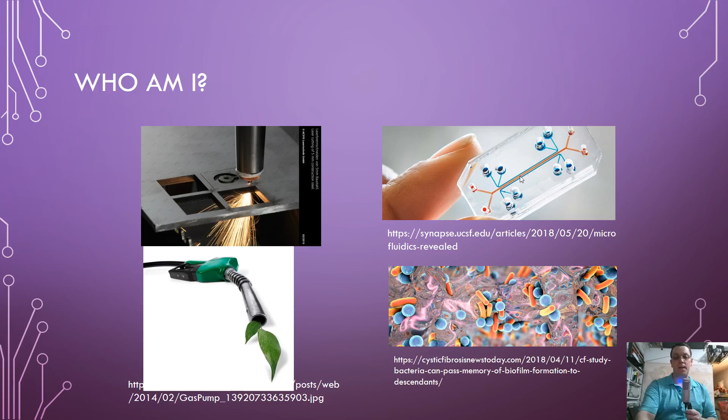So I've worked with ethanol and butanol, and if you guys have questions about alternative fuels, why ethanol is really a complete mistake by our economy right now, and we need to be pushing for more advanced biofuels like butanol, I've learned all kinds of fun things about those, so come talk to me at some point about those if you have some questions.

So I'm going to go through some of the basics of what to expect in the course, but one of the first things we've got to do early on is we need to get you guys downloading and installing this. So I think likely there's going to be on your tables some sheets with the serial number that you guys are going to need. So go to this web link: solidworks.com/sw/education/SDL form.html. You can also get there by searching for SolidWorks and then SEK, as in Software Educational Kit, and that's what will get you there.

I may have also posted a form in the week 1 announcement to LoudCloud, so go there and start downloading it. That is going to look something like this. What you're going to see here is an option for downloads. You're going to say English or your preferred language. You're going to say yes, I've already got a serial number, because you're already going to have a serial number. The version you want to select, this is very important, you want to select the 1920.

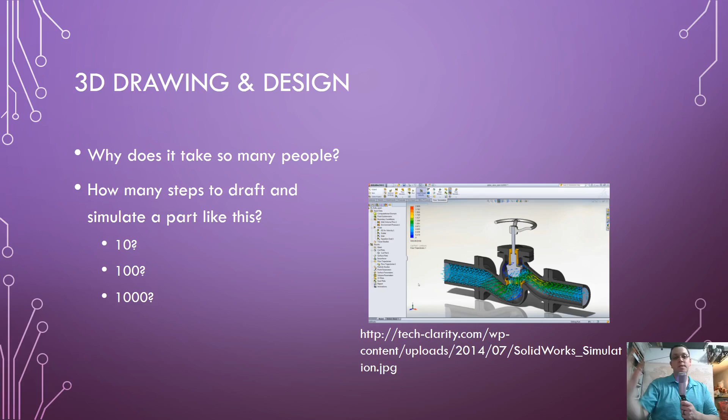Okay, so what we're going to be doing primarily in this class is the SolidWorks software. We might sometimes use MATLAB for a couple things at a later point, but we'll have to determine that. This is something you're going to use for a lot of other classes anyway. But you want to make sure that your computer is compatible by going to the SolidWorks system requirements page. And the idea is, if you're running like a dual core laptop from 2002 and you have like 2 gigs of RAM, you're probably going to struggle in terms of hardware.

Another thing that you guys are going to want to do, and this is something I want you guys to start trying to do early on, is get yourself a mouse to work with. See this? This looks really super fancy. Do you know how much this cost? $20 at Fry's Electronics, okay? There's all sorts of mouse options. I prefer a wired mouse myself because I have slightly large hands, and those little carpal tunnel mice drive me absolutely insane. I cannot work for long periods of time with those comfortably.

The more comfortable you are with your tools, especially ones you're going to be using day in and day out in engineering, the less distracted you're going to be, and the more efficient you're going to be with your workflow. All of those 5 minutes here and there adds up, because how many people have taught you so far that you need to be spending typically at least an hour to more like 2 hours outside of class time for every hour inside class time? See, that's what I thought. Not a lot of hands raised. So that's an expectation that engineering has on you as a student.

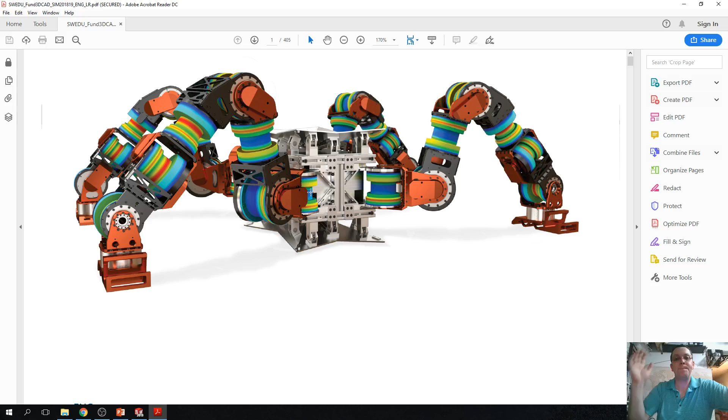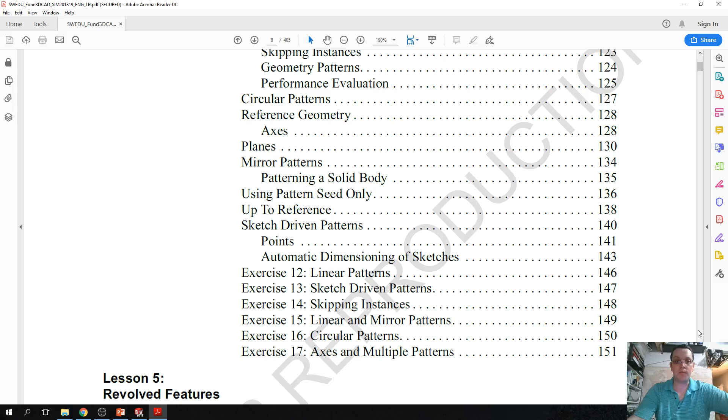That's okay. That's actually okay. Especially if you guys have had some amount of experience in this before, or some amount of experience in 3D drawing in general. It's going to teach you a lot about how these things work. So it's going to walk you through some of the basics of sketching, give you some example exercises. So it's even going to show you what some of the buttons look like.

Let's see, where's the starting point? Yeah, so it'll also point you to the tutorials. So there are some SolidWorks tutorials you guys are going to be actually working on as part of the homeworks for some of these. So you need to complete them and then submit them. There's also some rubrics that are going to go with those. And where all of that is located is actually going to be under Help.

So one of the things you're going to want to do at first is up around SolidWorks there will be kind of an arrow you can move your mouse over that'll expand this menu. I pin it because otherwise it's a moving target and that can get pretty annoying. It's a lot more convenient if you just pin it and say, okay, now I want SolidWorks Help. Well, how about the SolidWorks Tutorials? Oh hey, that opens up a window with tutorials.

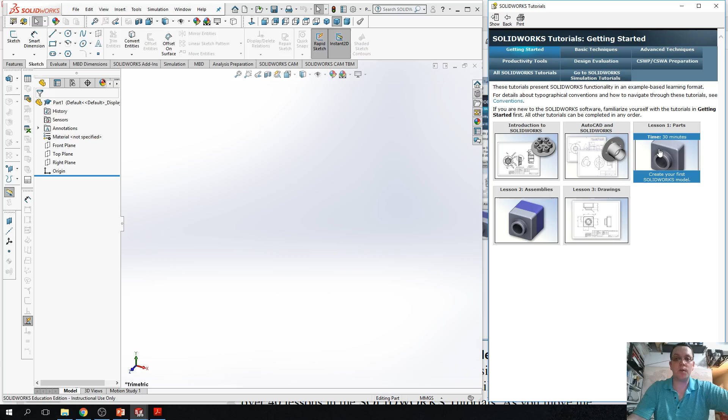So one of the quickest ways on your own, we're going to focus each day on some different kinds of specific skills, how and why to apply them. And one of the things that we're going to do is learn just some fundamentals about the interface. So there are a few that you guys are going to have to do. I think the parts might be one of them. So what it's going to do is you want to go to, let's see, creating and saving a document, for instance.

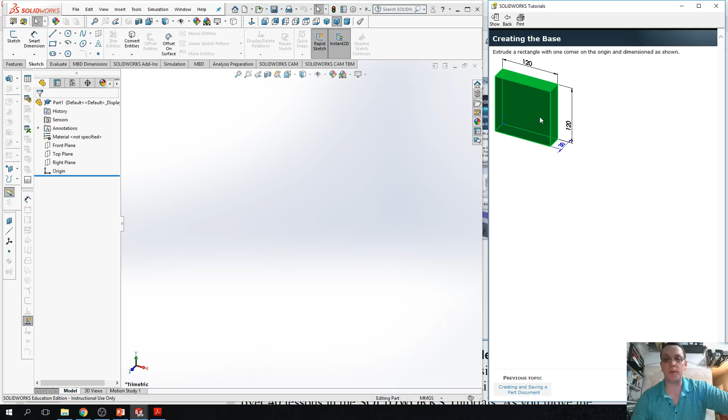So what these tutorials do and why we recommend you guys using these is there's these little orange boxes. So if you click it, it's going to show you in the interface what some of those specific buttons are, and it's going to help you start learning a little bit more about how to use the interface, how to save models, different options for saving, and then eDrawings and things we'll get to much later. Those are not really as useful as what we were hoping they would be, but each and every time they will show you what you're doing. So this is like an overview, and then they tell you how to get there.

And so we're going to go over a few kind of basics today, but that's where the actual tutorials are located. So those are pretty helpful, but you don't necessarily need to use those immediately. So what's one of the first things we want to look at today? I want you guys to get familiar with the Command Manager here.

So one of the other things I want you to know is there's all sorts of things that can mess with the interface. Sometimes if you're working on one of the computers that are around the edges of the room, some of the time those will have lots and lots of reconfigured tabs and all sorts of just really strange behavior. So this one, the Command Manager, can be gone, for instance. It can be missing, and then you can't find it. You're struggling to figure out where did all the things in the software go.

I don't understand. You can always come back up here to Tools, and you can find under the Windows, under Tools here, there is the Command Manager. Where's this one? They've updated a couple of the menus, but this is part of what I want you guys to actually work through in order to get these to visualize. Let me see this one. So I guess they've moved it here to a right click for this version. That's a new feature that makes it a lot easier on you guys, especially if the Command Manager goes away, because that scares a lot of new users, and that's okay.

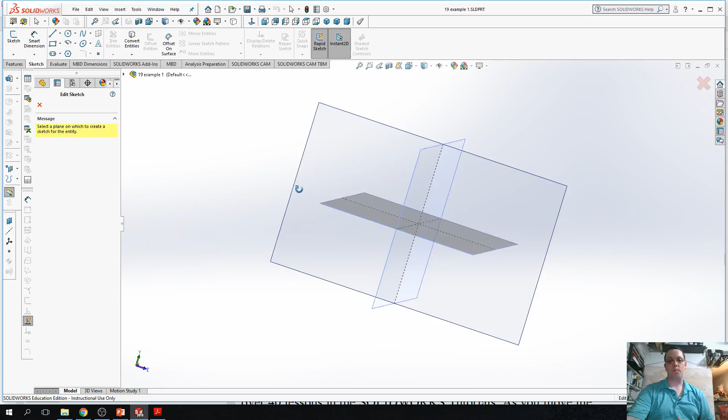If you click the mouse wheel, if you have a mouse today, it's a lot easier to see what this looks like. You can rotate the view around in 3D from all these different planes and get a sense of where you are. You have the origin visible here in terms of which directions each of the vectors are pointing.

So for something like that that's standing up, we think of the top plane as being the top of something, the right plane being the side view of something, and then the front plane being the front view of something. So for this, we'll go simple. We're just going to select the front plane.

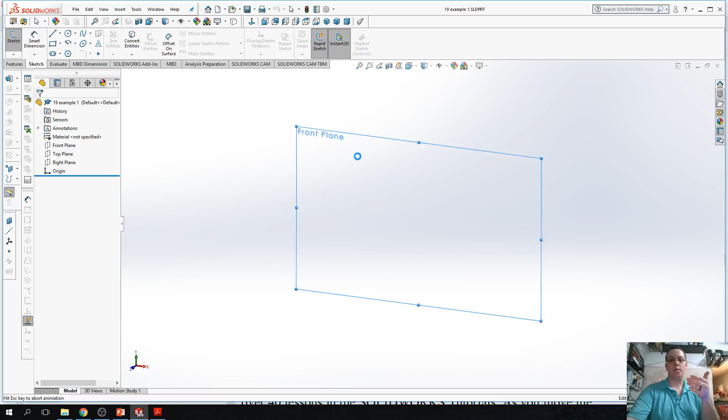So now we are what's called in a sketch. If we are working on something and we have to work on two different parts, and as we get into 3D, we're going to want to be able to step in and out of different sketches that we make to create different features of different parts. That can be a little bit confusing because now I just stepped back out of the sketch.

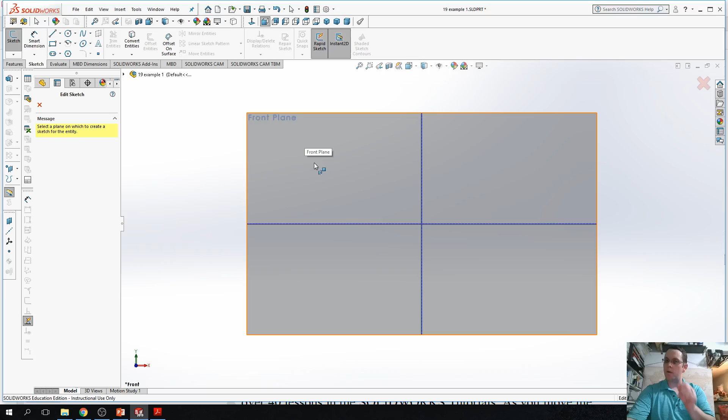And if I go to make a sketch again, it says, well, you were on the front plane, but is that still where you want to go? I can either go to the top or the right, but I want to stay on the front plane. I just want you guys to know early on that we're starting at a front plane sketch for this.

We're stepping into a sketch to make it. Then we will step, almost always, out of the sketch in order to make it from a 2D feature into a 3D feature. So we're going to focus the first part of the course on 2D, but this is why some of this stuff might seem easy for some of you and really confusing for others. We have to lay this foundation in order to be really good at making parts later.

Another really important part of the interface is down here. This is what gives you the dimensions that you're using. I almost always work in millimeter gram second. Sometimes the default will be set up to inch pound second. Depending on what you're drawing and in what context, it'll have to change, but it doesn't really matter which set you're using so long as you're consistently entering dimensions.

And that's what we're going to learn about for the Smart Dimension feature later. I think we're going to focus more on that on Friday. So for now, let's start with a simple line.

Simple, easy, basic line, started at the origin. We'll learn what these different kinds of white and yellow boxes that are appearing mean. We'll learn a lot more about those specifically on Friday.

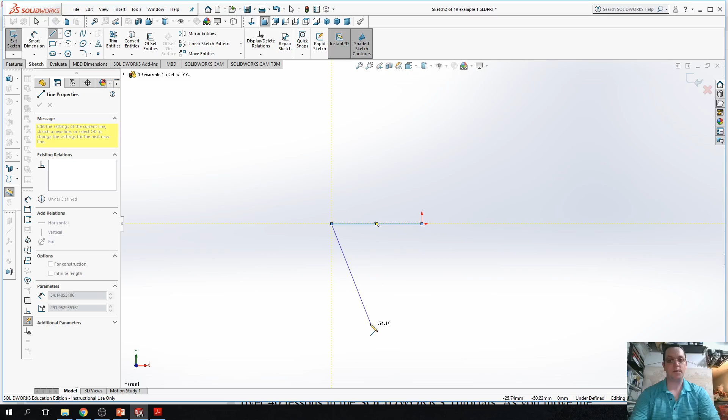Okay, so there's a line. Now I can either continue to draw lines that are connected, and make them parallel. I can make them at an angle, parallel. I can make it perpendicular. There's a center point there. So here it tells me something about an angle, so I can make a pretty good guess at what might be almost a triangle or something like that. There's all these different kinds of reference points that we're going to learn lots more about as we go farther into the semester. But this is the basics of how to use lines to start connecting a geometry.

So try and see if you can use a line to make a square, a rectangle, and a triangle. Give that a try real quick with the line tool. The instructor, whoever's subbing for me, can walk around and answer any questions, especially if you're struggling to find where those tools are, or you're lost as far as the ribbons or things like that. So go ahead and pause here and do a little troubleshooting real quick.

Did we pause? Oh, I see. Everyone's an expert now. Okay. It's just like the YouTube comments section. Everybody's a doctor, a lawyer, a physician, a theologian, and all kinds of other things, a scientist.

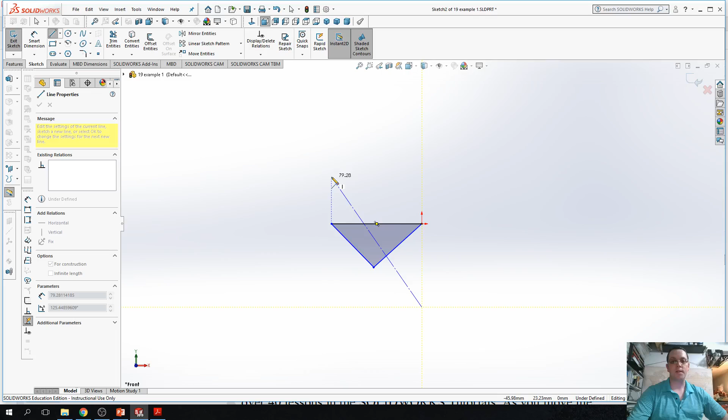So there's a couple different options for what I can do for a center line, but a center line is used just like what it sounds, as a reference point. I can set this at an angle, I can set this at another angle, I could run this through a center line of something else, I could associate it with a center line of something else, I can make all kinds of relations. This is why we're going to learn more about this on Friday, because that turns out to start being very, very important for what we're doing. For now, what I'm going to do is just set a center line along the axis. So this is a line that doesn't actually become part of your geometry, but a center line becomes really, really, really important.

The reason why is we want to be able to often reference some distance away from the axis so that we only have to draw half of a shape and then perform some operation on it in order to leverage the symmetry of something.

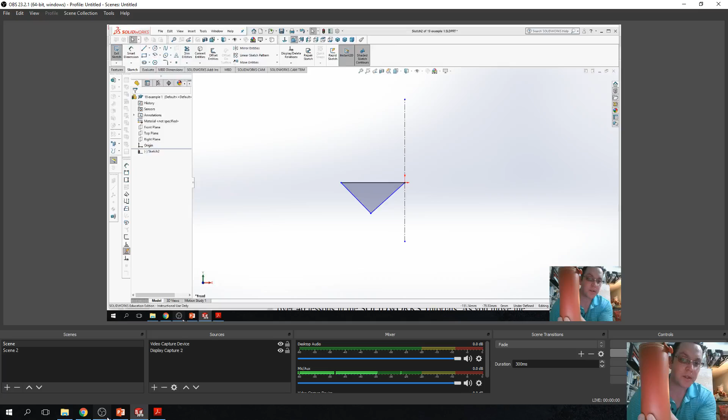So a great example would be this travel mug. If you take off the lid - imagine taking this lid off, I'll hold it up to the camera a little bit better so that you guys can maybe see it. Let me check the outgoing message here and send you guys down the infinity hole. There we go, scale's about right. So as you rotate this, it's the same all the way around, except for the lid, right?

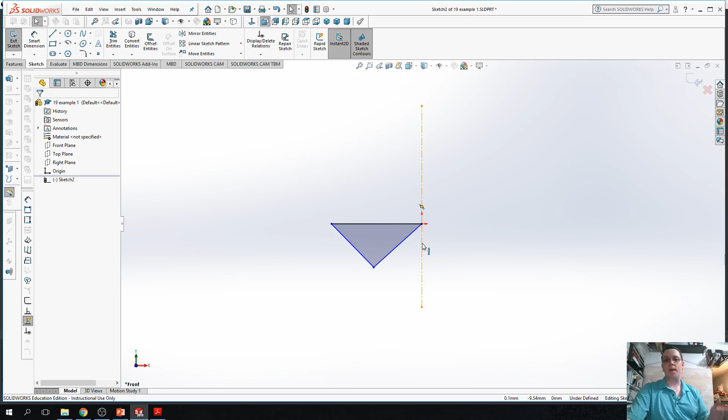So there's some things that we can take advantage of when we're trying to build different sorts of shapes. Those are some of the things that we want to be doing. So the center line is very, very, very useful, and something that you guys will be using as reference points for dimensions and all sorts of things. You can add them really anywhere in your drawing in order to establish a distance between something and something else. So there's a lot of capabilities that we have for center lines.

So see if you can draw a couple center lines using a couple of these different techniques, and see if you can connect some of these key features - something like that, so that you can actually connect a couple different points from a center line to a geometry and so on. So let's pause here again and do some quick troubleshooting and practice.

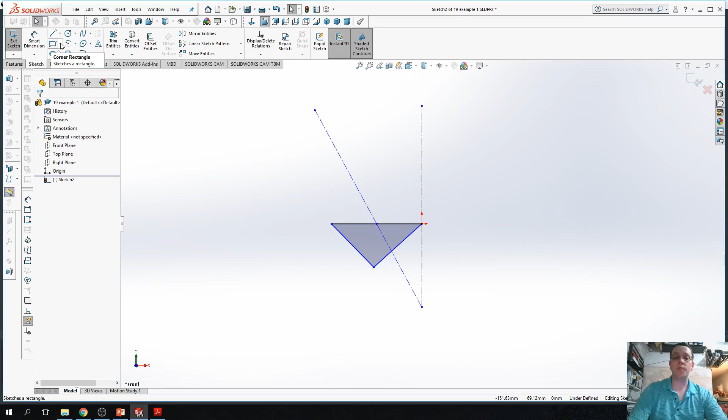Alright, and we're back. So now what we want to focus on is how to actually use those center lines in order to do neat and exciting things. One of the things we're going to focus on is some more basic shapes. Splines can be useful for specific applications, but we're not going to focus on them heavily right now.

What we are going to do is a lot of different rectangles and circles, things like that. So rectangles, corner rectangles - what that does is you grab a corner and set the other corner. Pretty basic, pretty simple, but sometimes that's not really the best option for how to draw something in your shape. So what about a center point rectangle?

A center point rectangle is something where we start at the center point, and then you have what looks an awful lot like center lines, especially if we zoom in.

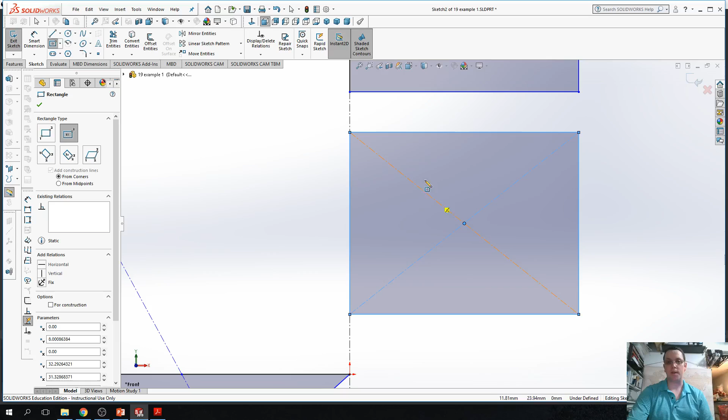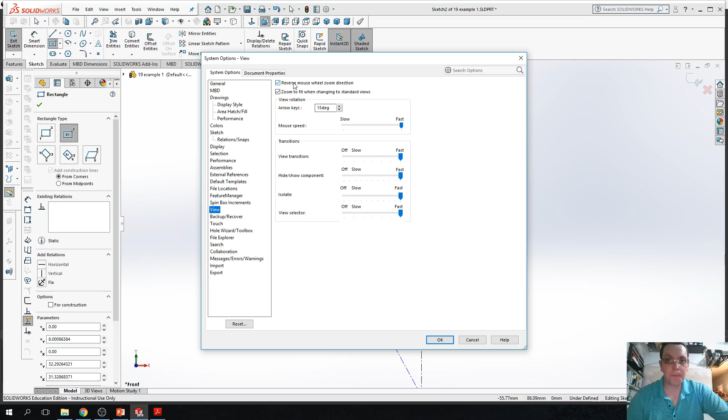That's another pro tip - scroll the mouse wheel back and forth. It's day 2, if you guys haven't already gotten yourselves a mouse, that really needs to happen soon. The software doesn't cost you guys anything, so you really may want to make sure you're using a mouse. You also want to make sure in settings, or under options - under, let's see, where is it at? Is it under view? Yeah, reverse the zoom direction. Only noobs zoom backwards to zoom in, so don't be a noob, be a pro. Zoom in when you zoom in, zoom out when you zoom out. It makes a world of difference, I promise. Many of my students have said that one thing has saved them hours of their lives.

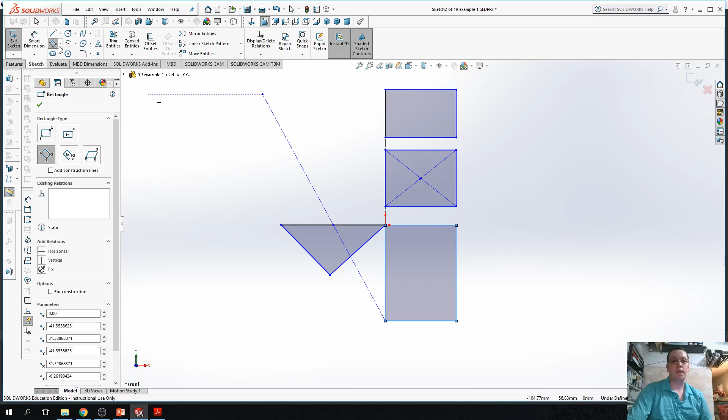So here's some of the other quick things we're going to do. Center point rectangles are useful. You can also establish 3-point rectangles - maybe you say, I need something here, here, and here in order to be a reference point. So what I did there is I established 3 different points of the rectangle. That can be very helpful if you've got part of a geometry that you need to connect things to, and as we learn more basics in the infrastructure of SolidWorks, we'll learn a lot about how to make that happen.

So another useful one is the 3-point center rectangle - this one sets at an angle. So here I can set it at a slight odd angle. If we need to set something off at a bizarre angle, this is a much quicker way to get a basic rectangle, but not in a 90-degree sense. It allows us to do some pretty interesting things, and then we can even do parallelograms.

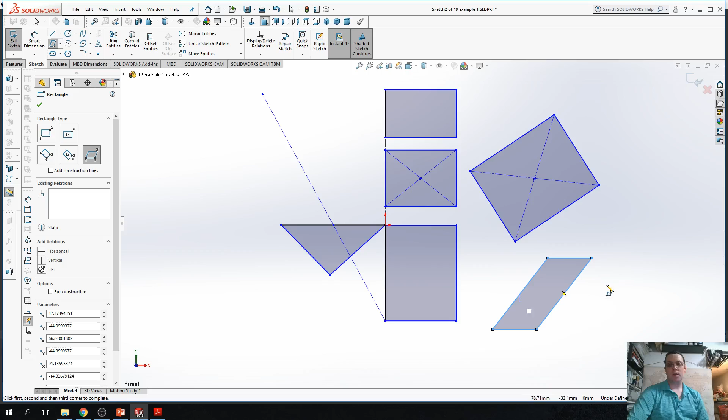Neat, right? So go ahead and see if you guys can make some basic fundamental shapes using just these different types of rectangles, and make sure you use at least 3 of the different types of rectangles to make a shape. Go ahead and pause this and do some troubleshooting with the kids.

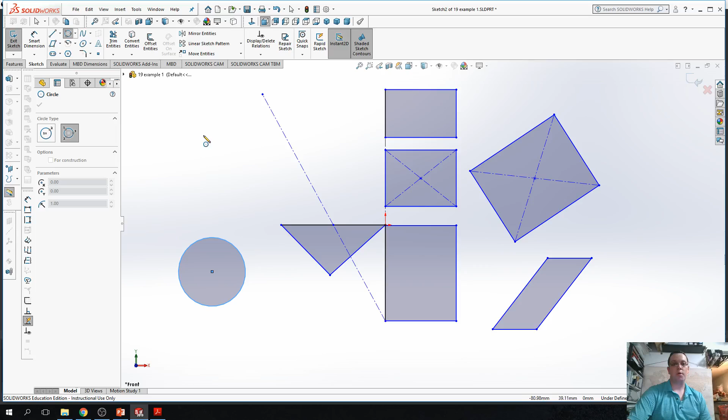Alright, and we're back. So now we've done some basics of rectangles, we also want to take a look at circles - those tend to be pretty important. There are 2 main types: one is the center point circle, the other is the perimeter circle, so I need a circle here, here, and here. Depending on what we're trying to do with our shape, right now we're sort of going a little bit modern art with all of our fun features.

But this is an easy way to say, alright, maybe I'm trying to design a wheel and I really need to make sure we can pass the MCM shoe test. If you don't know what the MCM shoe test is, then you probably haven't used the internet enough, and you're kind of missing out. It's the idea that if you have a really tall vehicle with really tiny wheels and you can shove lots of tennis shoes between the wheel and the fender, then it fails the shoe test and your car needs to be lowered. That's what that means.

So if you were trying to do that and wanted to trace the fender at 3 different points, you could say maybe it was an arc, and I'll just do a quick example.

So maybe this was the arch of the fender, right? So if that was the case, we could come back in here and we could do a 3-point circle and say that one, and that one. And that would pass the MCM shoe test because you're not getting a shoe in between that gap. So that's a quick way to use something like a 3-point circle if you need to match a partial

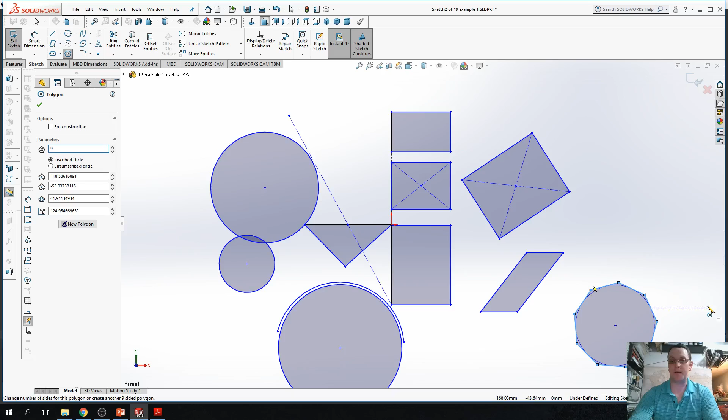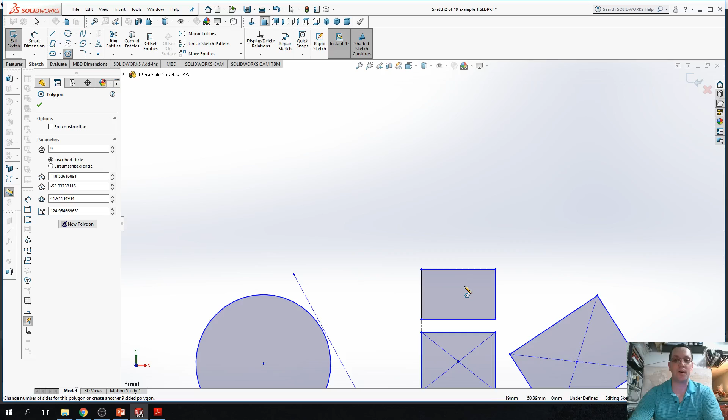Another quick interface tip that's probably about the last one for today is holding down control and clicking the mouse scroll wheel at the same time allows you to move the sketch around. And those 2 things, being able to move the sketch and zoom in and out, will allow you to do lots of great, incredible detail work on stuff in no time.

So go ahead and play around with the polygon and see what kinds of interesting or unusual angles you guys can actually come up with. And then when you're done with the polygons, to insert them, click OK, and then hit escape to deselect those. So go ahead and get a little bit of practice with those as well.

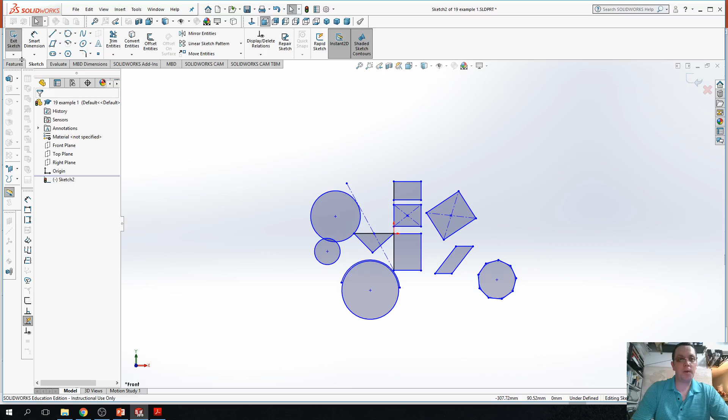All right, so what are we going to be working on today? Well, here we go. So we're going to open up SolidWorks, and we're going to start with a new part. So I'm just going to make a new part so we can start with some of the things we did yesterday, but we're going to continue to build on the capabilities that we've already got.

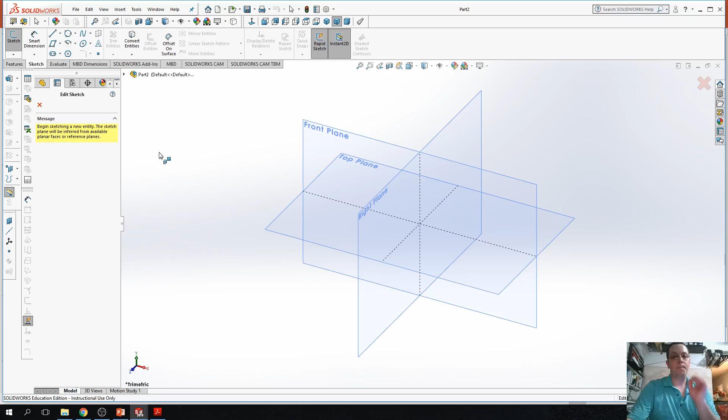So what are we doing first? So one of the things I wanted to touch on was relations and what that actually means. So for that, I'm actually going to be doing a center line. So I'm going to start a sketch.

I'm going to pick the front plane again, and I'm going to start a center line. Now, what I'm going to do is I'm going to start by saying this one is what's called a coincident point. So a point starting that is connected to a line somewhere. So coincident means it's actually going to touch the line. If I move it just a little bit, it's no longer going to touch. So you have to use the information that these little boxes are telling you.

So to the left of the pencil, we know we're drawing. We're not selecting, we're drawing. That's what the pencil means, and it's not the arrow. If we deselect that by hitting escape, we go back to the cursor, right? So if we're drawing a line, especially a center line specifically, we get a pencil with a center line. If we change it to a regular line, it'll be a pencil with a regular line.

Gee, that's funny. It's almost like they paid attention to what they were doing.

There's also a midpoint line. A midpoint line is also helpful, and so you'll see the same two basic relations here at first. There's this one, which is basically meaning it's tangent to or adjacent to. So this is a coincident point. Coincident is actually what they call it in the drafting competencies. So this is coincident, meaning on the line.

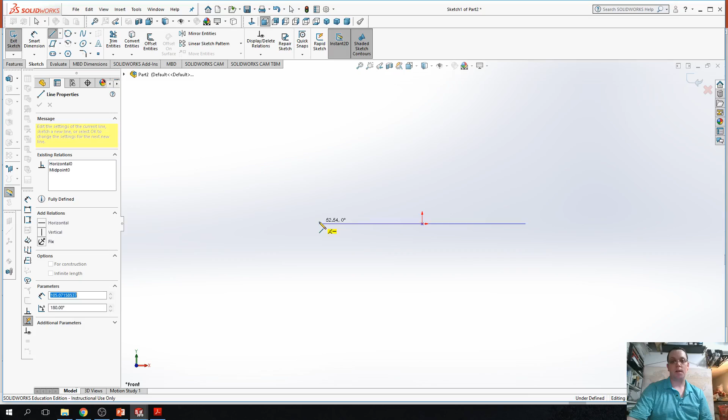So we're going to start, because this is a center line, we're going to start and look. This is a line where that was the center point. So then it goes to regular lines, and we can continue making a shape. But we also want a center line. So the center line is going to give us a reference point here. So there, it's not only coincident, but it is also parallel to this axis. So that's what those two things are.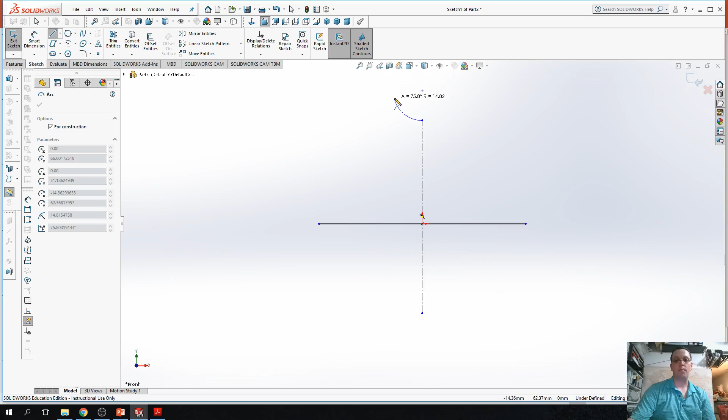So now, if we look, there's also center lines you can do with arcs, depending on what you're doing and how you sweep this past. So you can have it be a center line, or you can have it be an arc reference line. So if you need some sort of a reference curve, there's lots of different things you can do with those. What that tells you is that this is at an angle, specifically 270 degrees. This tells us a reference angle of 180, or a reference angle of 90. So each of those are a possibility.

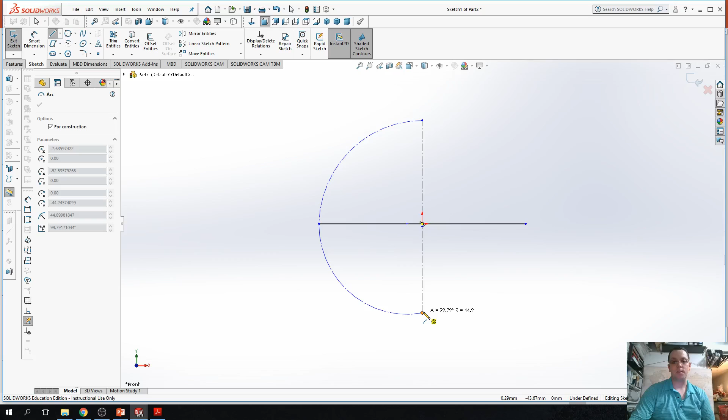In this case, I'm going to just do a quick reference. So by sweeping back and forth, I'm able to select which type of axis. So you notice, depending on which direction I'm sweeping the pencil away, I'm sweeping the center line down, or to the side, or up, or down. In this case, I'm sweeping the center line around along this axis, and now I have two different axes.

Because these aren't of equal length right now, I'm not going to be able to get an even curvature, but one of the things that we're using today is going to be really helpful with this. So it's called Smart Dimension. So let's say I want this dimension to be 50, and the default is millimeters, but if I put in 50 inches, then it'll set the default to 50 inches. If I set it to be 50 millimeters, it'll set the default to be 50 millimeters.

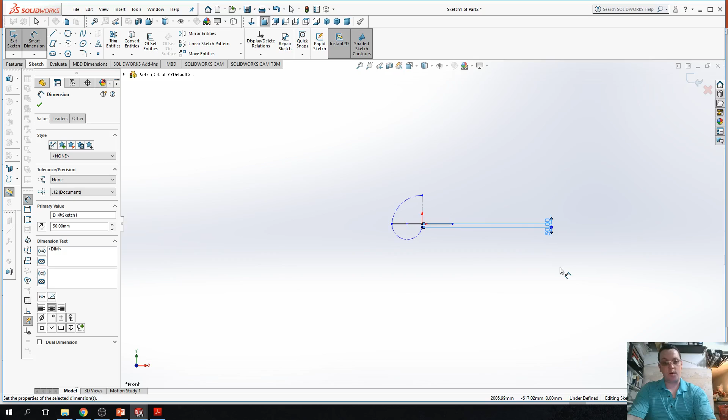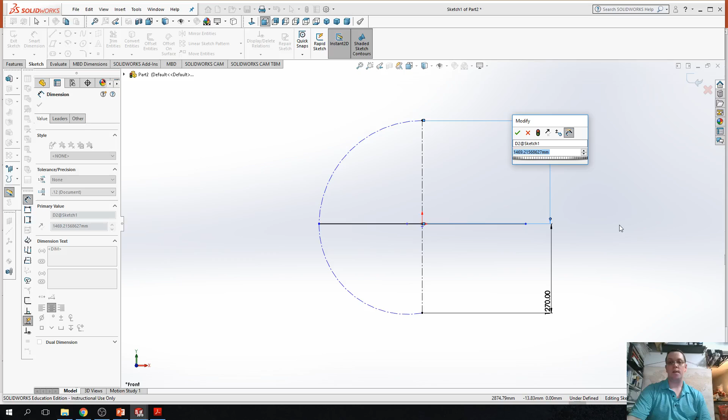So anytime we're entering dimensions, whatever system we're in, we can always go back and change that. But once it's changed to a black dimension from a blue dimension, it's what's called fully defined. So the computer knows everything it needs to know about that. So now I'm saying this one I want to be 60 inches. So now you notice this dimension changed as well, because this point is coincident with the arcs.

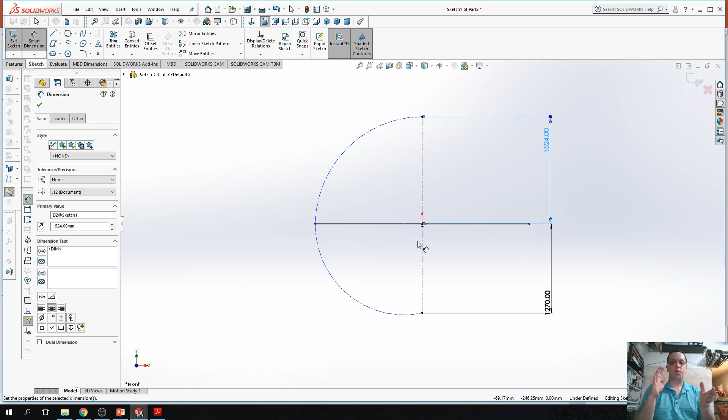So what that means is, by establishing these relationships, as we start changing some of the dimensions using the smart dimensions, different lines are going to stretch and change or shrink and move depending on what relations we're trying to define. If we try and define too many, it's going to tell you an error and it's going to be overdefined. If you haven't given it enough, it's going to leave some things blue, and so those are going to be underdefined. And so I want to use the smart dimension between, so that one is still going to be a 90-degree arc. But I can define the radius if I want to.

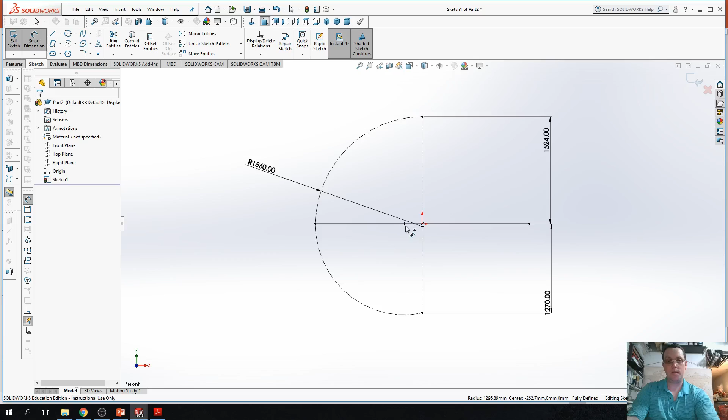So 1560 is our radius. So this one, I can actually also do some clever trickery. See that when I said that overdefined message, there's a few things that'll happen.

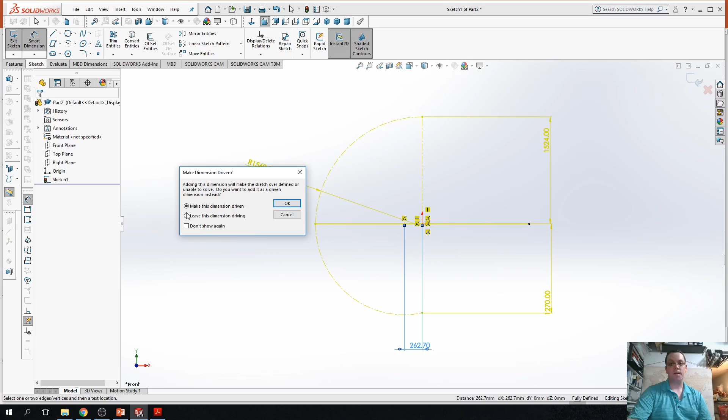So what it's trying to tell you is, wait a minute, if we move this dimension that right now is this center point rather, this origin for the arc, is coincident with this line, but it can't also be coincident with this center point and all of these other relations at the same time, because the arc physically won't work. And so if you just say, okay, I don't care, and you try and move it, especially if you try and say this dimension is 0, you can't change it because you have too many things already established.

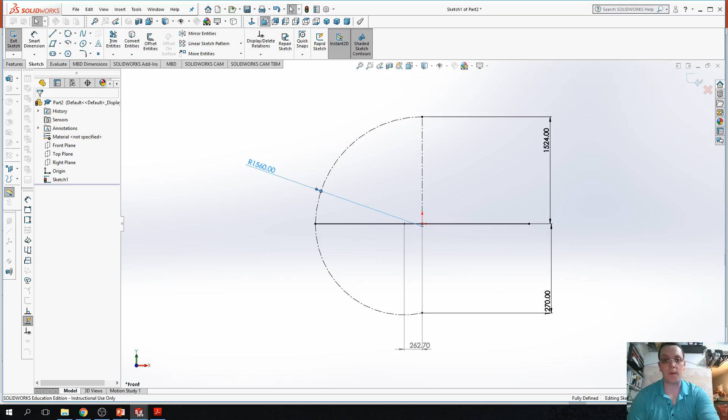So what do I need in order to change that? I need to recognize that this dimension is monkeying with what my other dimension is. Now, if I set this dimension, I need to move this here. See, this is what it was trying to tell me is, well, now I can't keep that same length and reach the arc that you want me to. So at the end of the day, what do I have to do? Well, now there's a couple other things that I can do.

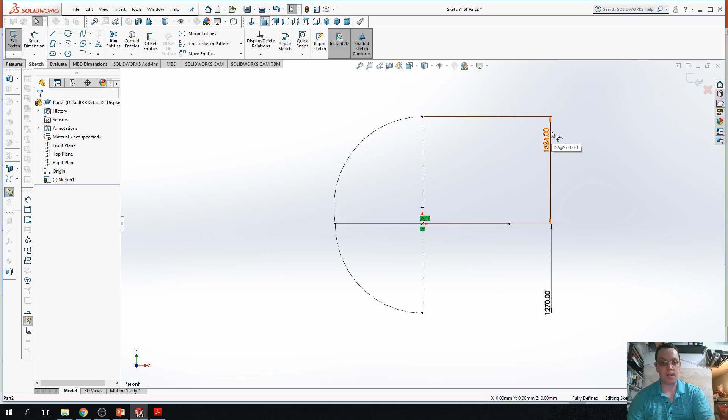So I can add another relation, and I can actually make these two things equal. So I can step out of the smart dimension, and I can have this highlighted. I can right click this. If I right click both, I can zoom in to look at both of those, but what I want to do ideally is set this one equal to this one.

So this is our smart dimension feature that allows us to scale things down to equal. So if I set this to 1270, now what I've done is made these two equal, and I have a defined arc. So now I could come in and trace that arc or a bunch of other things, and I could get some pretty good progress going.

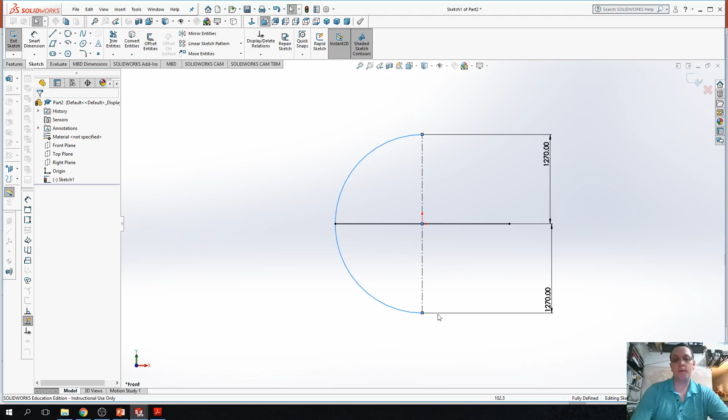So now that I have the center lines as a reference, I follow along with the arc, and I have two sides of something, and now that this is especially even, there's a couple of ways that I can do this, but what I want to do is take this shape and revolve it. So I can connect this with a line. So now this whole sketch turns black.

I didn't change any of the dimensions, but by having those defined relations and the center lines as reference points, using the coincident references, I was able to get this sketch to be fully defined, which is always the goal. Once a sketch is fully defined, we can start doing some really interesting things with it. So one of those is an extrude, and we're going to take a look at that, and then a basic sweep as well, and then we're going to have you guys do a little bit of practice.

So first I want you guys to practice some of this on your own, come up with a shape using some of these tools and basic shapes, help yourself by using some center lines as reference points, and using the smart dimension to rescale some of the different angles and dimensions, so that you can get the shape that you want in the size that you want. You want to try and get to the point where, instead of all the blue lines, you have all the black lines, so it's a fully defined sketch.

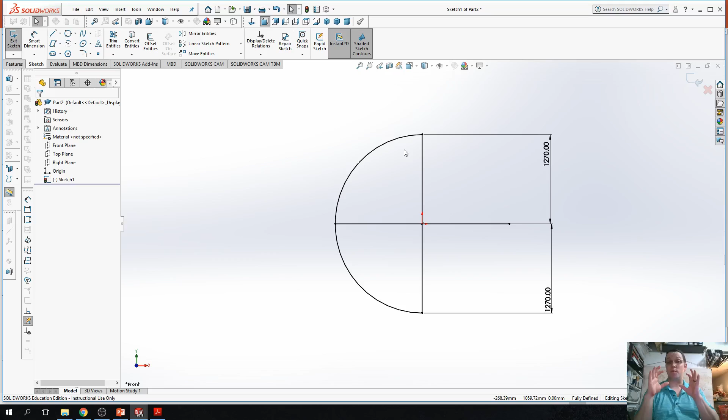So this is a lot of things to start trying to do already, and it's a Friday, but that's okay. So go ahead and pause this and get some practice in. It's okay, I'll wait.

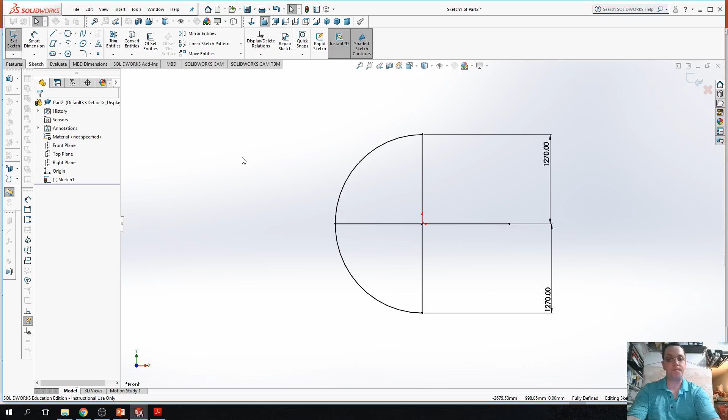Okay, so this is what we're going to start doing now. We're going to do a couple basics. Now that we have a fully defined sketch, we're going to hit escape. Okay, so we're out of the sketch now, so you can see the whole thing is blue. Now we're going to perform some operations. We'll learn all about some of these basics throughout the semester.

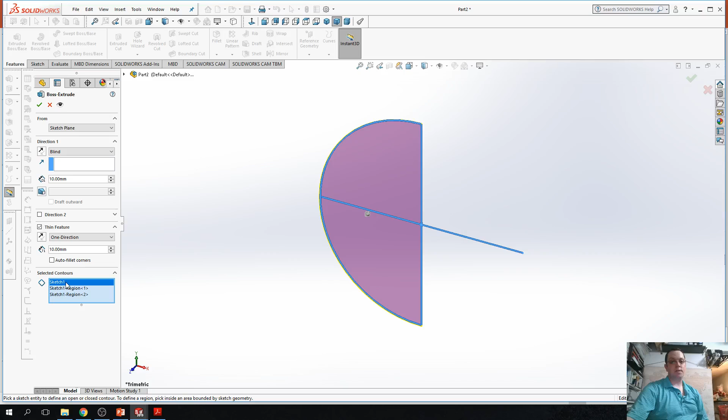The easiest one is an extrude, and what you want to do often is grab maybe one region instead of another. For this, I don't necessarily want this. I just want this region inside our half circle.

So one of the things that we want to start thinking about as we're getting from a 2D perspective to a 3D perspective a little bit, we're going to focus mostly on mastering the things in 2 dimensions before we start really bringing it up into 3 dimensions. But these are some of the quick tools that we can use pretty effectively.

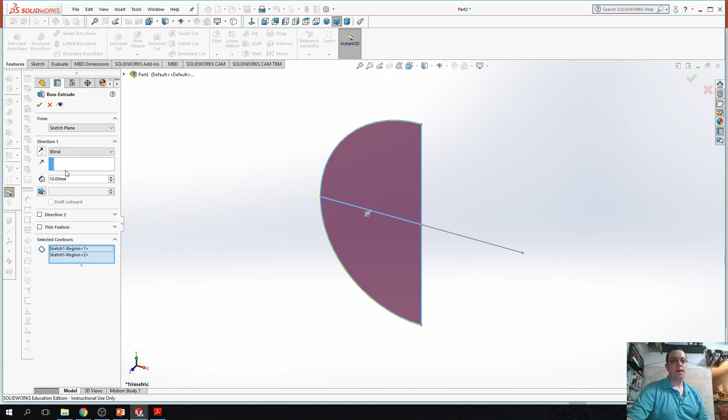Most of the time for the default settings, you're going to always deselect this thin feature. It is exceptionally annoying. It is, for most of the things we're doing, completely useless. So you deselect that, you come up here and you check the OK box. You can also look at a detailed preview and some other things, but you want to, from the sketch plane, extrude it 10 millimeters. So you can see this actually has thickness now, and we are able to make it work for a few different things.

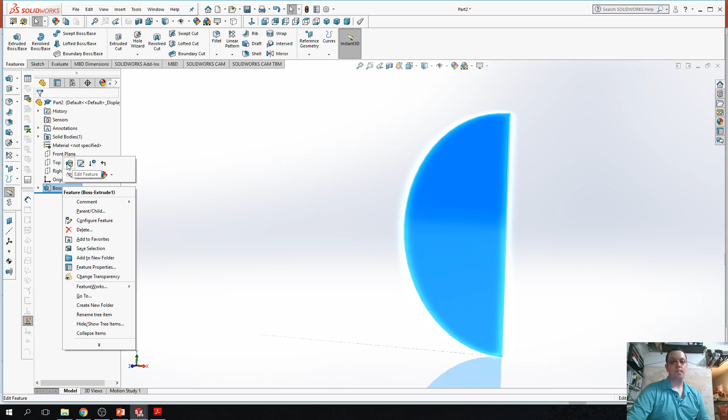I can go back and edit that now. If I don't know that that was the right thickness, maybe it actually needed to be 100 millimeters because I didn't pay attention in UNV 112 when someone taught me how to do unit conversions again, right? That happens sometimes. So now we can see it has a little more thickness.

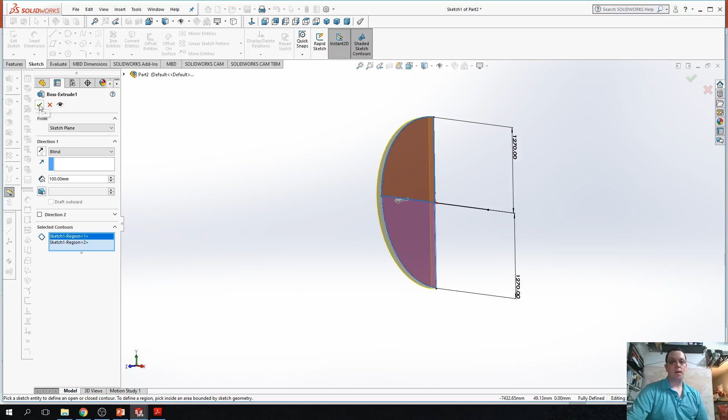So there's also things that we can do that are really fun if we edit that, and we can say, actually, I only want this region, and I want to delete region 2. So now I can just do half of my region because of how I did this. Now I can go back and I can do something that I didn't know about until a little bit later, but I'm going to show you guys early so that you're way ahead of the game.

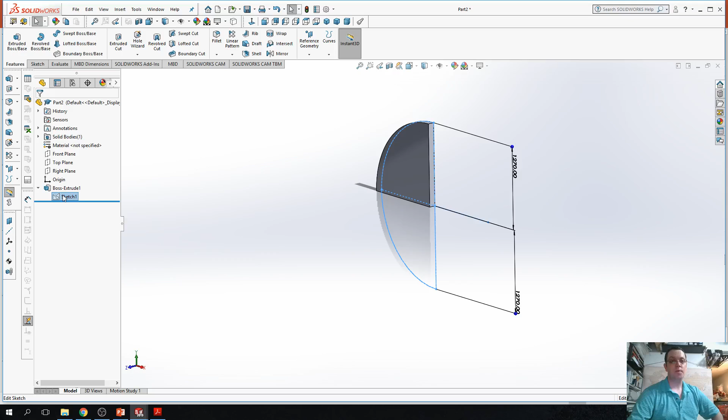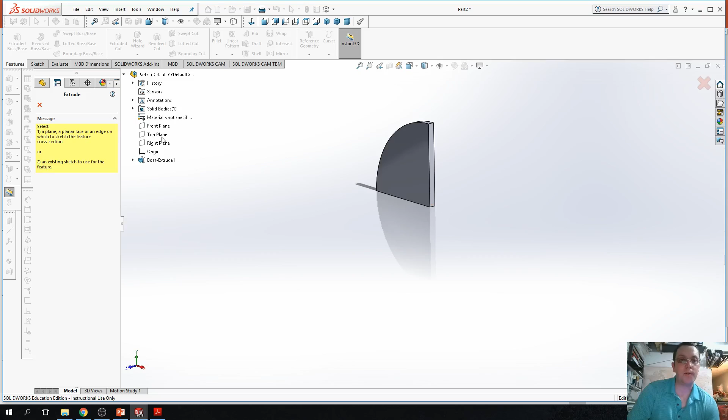You can come back and you can do another sketch, and so you can edit the sketch, but now you can say, actually, no, I have to be outside of the sketch. I can do another extrude, but now it's going to tell me, wait a minute, I have to have something selected in order to extrude it. So up here, this is what's called my part tree. I want to select the part tree, drop it down and say, under this boss extrude, there is a sketch, because I can only make an extrude based on a sketch.

Well, now I have options. So what I want to do is I want to select this region, which I didn't do an extrude on yet, and I want to get rid of the thin feature because that does nothing for anyone. But up here under direction, I want to reverse this, and I want this to be 1,000 millimeters. You can also pick the units manually, but millimeters are fine for this. And this is still going to be a blind extrusion. It's still going to be from the sketch plane. So we're not doing anything fancy yet.

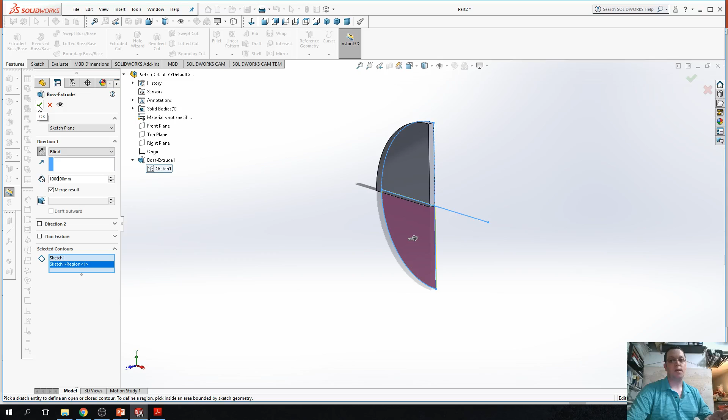But now I've made some sort of really unfortunate modern art chair, right? How you sit in it, I don't know. That's why it's an art chair. I don't think they actually sit down for very long anyway.

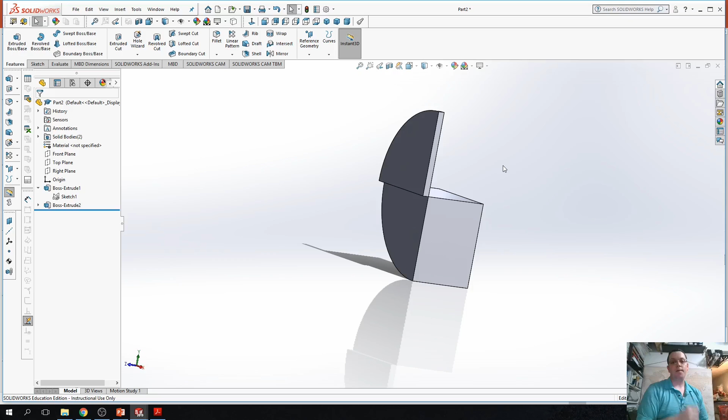So now we've made our little modern art chair all from one single sketch because I left in one of those center lines. Otherwise, I could delete it and make an easy single shape, or I could say, well, actually, maybe I wanted to do both sides for that one. So now I come back here and say, as far as the sketch regions, I also really wanted that region too.

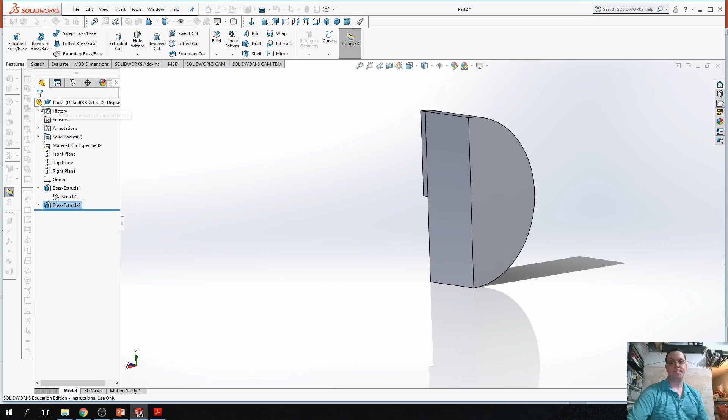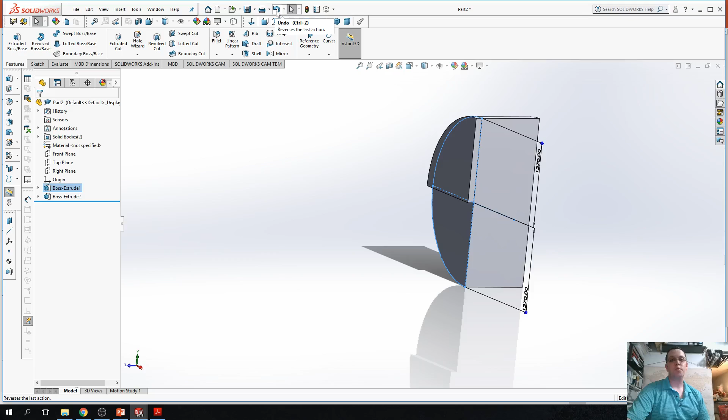So now I have a different sort of shape, but you can always go back and edit or modify these at any point, and you can also use the same sketch for multiple different extrusions and revolves for lots of different things. So for now, I'm going to step back. Another really important thing to notice is there is a Control Z, so you can undo all the stuff you did, but you can't go back and redo it. You can only undo more things. So careful when you undo things. You're only going to be able to go one way.

So first, before I show you the second technique, I want you guys to practice extruding all the different fun and interesting shapes you guys have come up with, so that you can get some hands-on practice with this. So go ahead and pause and we'll come back in a minute.

Alright, and we're back. So what we're going to do this time is going to be a little bit different. I'm going to show you a basic revolved boss/base. So this is a very different sort of technique. This is one that allows us to use an axis of symmetry to rotate something around. So this is how we make sometimes spheres and cylinders and things that have that sort of sweeping geometry, not to be confused with the sweep feature, which we'll learn about later. So there's some very interesting ideas on the sweep and how to make those work.

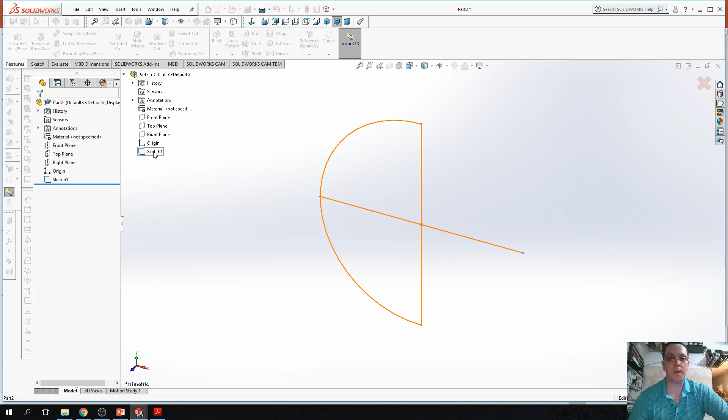So for a revolve, what we're going to do is, again, we're going to pick our sketch 1 because that's the thing that we're interested in, right? The axis of revolution, this is always really important. So it already picked the center line, which was line 2 in that sketch, the second line that I drew, because I drew the first line, then the second line.

The reason I'm encouraging you guys to start already with center lines is because you can use those as axes of symmetry, and the software will recognize that, so it'll save you a lot of headache and heartache down the road, even though right now it seems like, why don't you just do a line like regular people? Well, because I know stuff that you don't, it's kind of like I'm from the future, so just trust me on this.

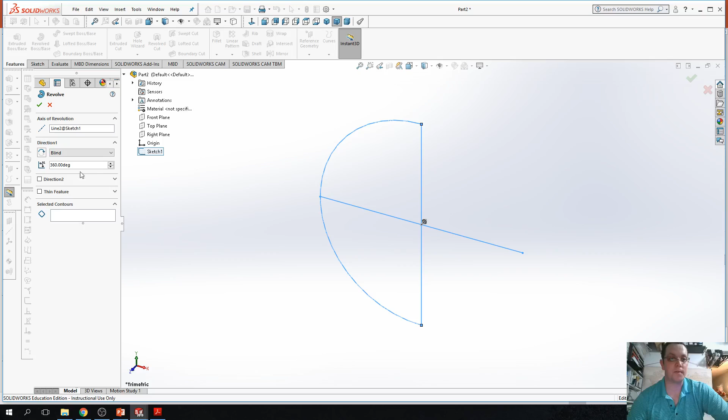This center line is what's going to be our axis of revolution. Now we're going to be able to revolve it. In this case, a blind revolve is fine, 360 degrees. I'm always turning off the thin feature. If I could go in and delete it from the software, I probably would, or if I could disable it from my interface. So now I'm going to select the contours. So I want to sweep these.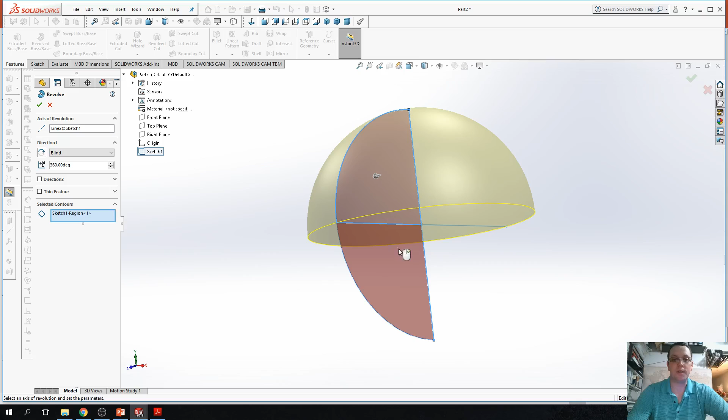Now, you noticed, interesting. So what is this shape? That's a half sphere or a hemisphere shape. This is a whole sphere shape. So now, no matter which way you rotate it, this is a spherical object, right?

So what we're doing, especially if we have a fully defined sketch, now what it's doing is leaving me the other reference lines in the sketch, but it's used all of the solid lines, so all of my other reference lines that weren't used in the sketch are still present so that I can see what they look like. This is another effect that I wanted you guys to be able to see.

If you start getting in the habit early of using lots of symmetry with center lines and reference points, and that's what you're using as your basis for dimensioning your projects, it is going to save you so much heartache and headache, especially when it comes time to do the actual exams. You will thank me for that later, just because of the amount of utility you will get out of this. So you can have a finished sketch with all sorts of interesting things.

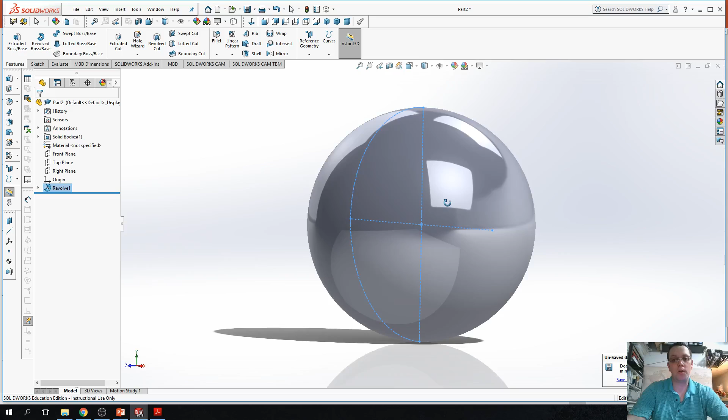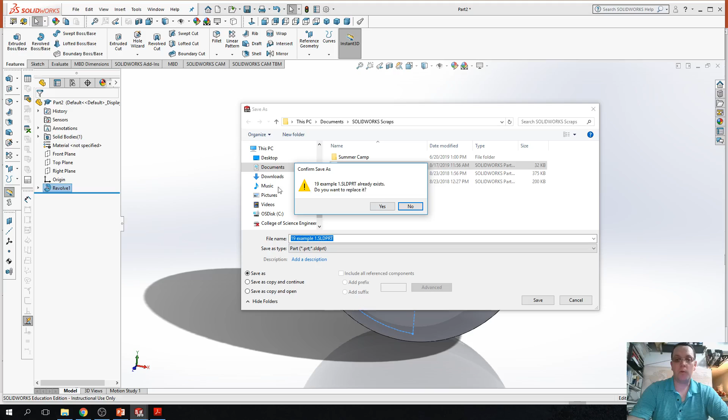And actually, this is a very timely reminder. You guys probably can't see it because my face is covering most of it, but the unsaved document notification says you haven't saved for at least 20 minutes. That's because I've been recording and trying to make sure people have things that they can work on while I'm gone. So you want to often save and update all the time. In this case, this can be in whatever number of parts. So this one I don't need to save at the moment, but that's because I know how to get back here very quickly.

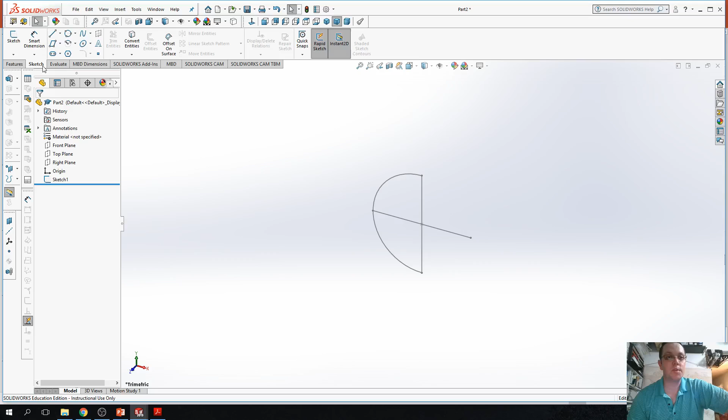So there's a couple things that we can do with a revolve. One of the other key features is we could say, oh, actually, I want to undo that revolve, but I want to make one more reference line. So I want to edit this sketch. If you hit sketch again, it's going to make a new sketch, typically. Now I had already selected that sketch, so that's a helpful feature. In this version, if you select the sketch and then hit sketch, it'll automatically start editing. Otherwise, it's going to start a new sketch and you have to figure out a new plane to work on.

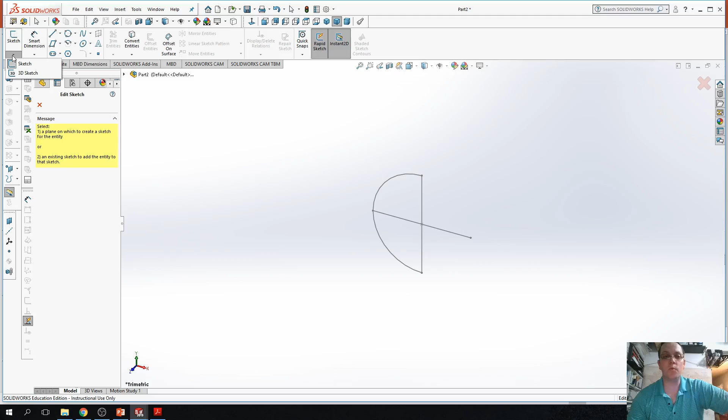So we'll do that later. That's a thing that we'll work on later. Edit the sketch is always the way to make sure that you are working on that specific sketch. So if I'm editing this sketch and I say I want to add one more center line. So right now this center line is parallel, using that relations information.

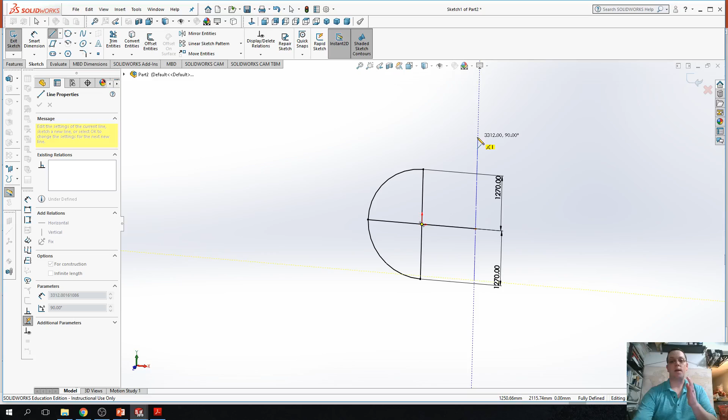Parallel. The circle means concentric, the two circles, meaning that that center line and the other line, those 2 points are going to be exactly the same, and then that one's going to be tangent. So now I have two relations that are happening. One is I am coincident, so I'm touching on that center line. The coincident is right here. And the other is that I am parallel to the other line in my sketch.

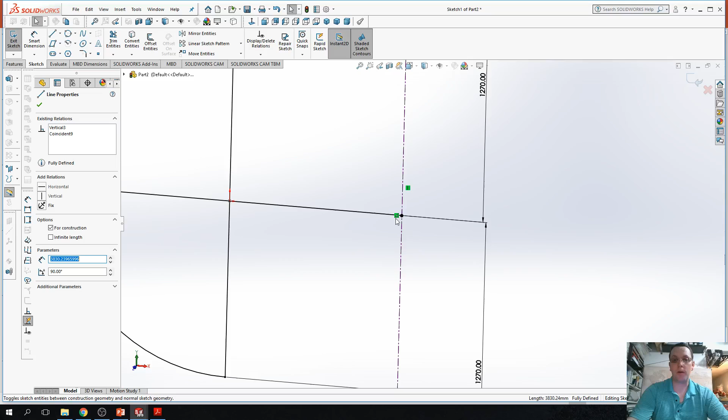So by setting up that center line, it doesn't have to be very long, but I can click and drag either way, and I've still got the same relation on that line. You can see both of those in green, so parallel and coincident.

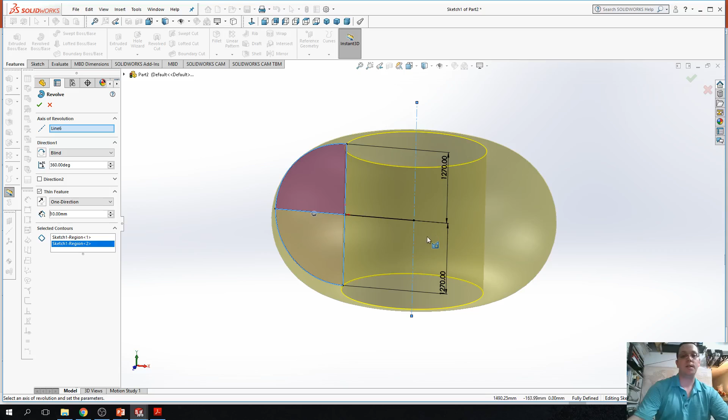The last thing I want you guys focusing on practicing today is this revolve. I want to revolve both of these, and it knows that I put up a center line, so it's automatically expecting that I'm going to use that center line as a reference point. If you get in the habit early on of making center lines for reference points instead of regular lines, you will make life so much easier on yourself down the road. Future you will thank you when you pass the CSWA exam the first time, instead of having to wait till a redo.

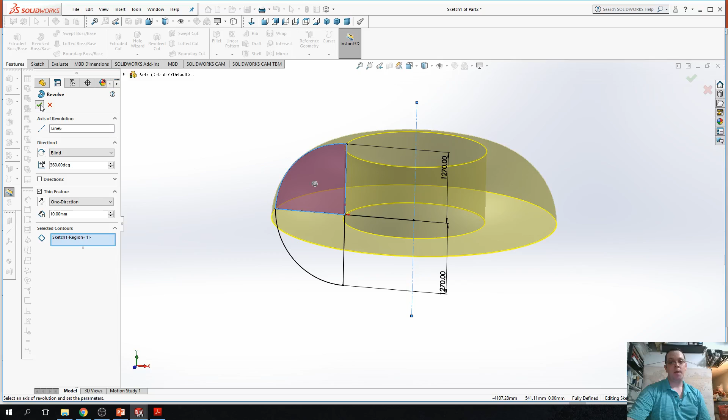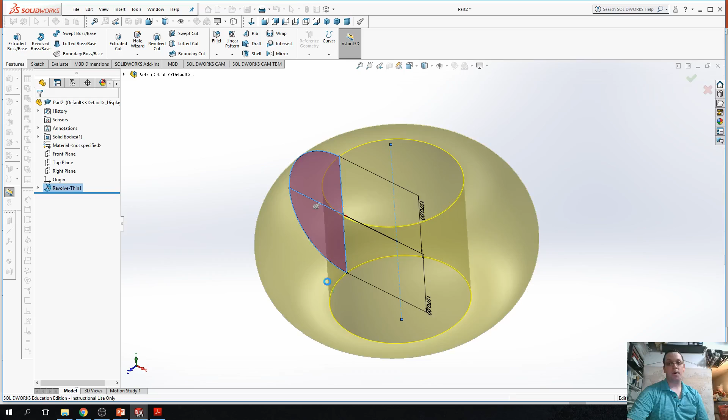So this is a shape that should look roughly like a washer, like part of a cap screw, right? So what if we changed that and used both sides? What does that start to resemble? Well, that starts to resemble almost like a donut, also known as a toroid.

My kids are probably the only kids on the block that are going to learn how to call those stacking rings toroids instead of stacking rings, and other people are going to look at them strangely, and then they're just going to say, my dad's an engineer, don't ask questions.

Toroidal shapes are a very powerful technique of the revolve, and it allows us to do lots of interesting things with an axis of symmetry of revolution. If you can rotate the same line around an axis, you can begin to replicate a lot of interesting kinds of shapes in 3D from very simple two-dimensional sketches, and save yourself a lot of work by leveraging the power of this technique.

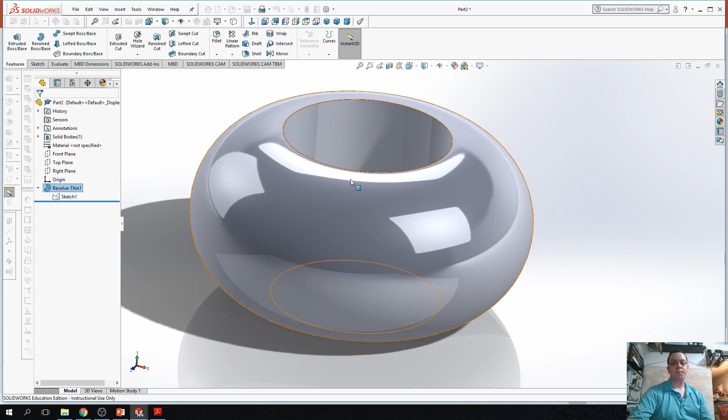So this is another great opportunity to pause and get lots of practice with several different shapes. I want you guys to revolve at least 3 or 4 different kinds of shapes, different geometries, around several different types of axes, and see if you can make all sorts of interesting toroidal shapes. Eventually we'll teach you how to do that with a rotational twist element. There's all sorts of crazy and interesting things that can be done to make those work. For now, that's what I want you guys to practice on. Go ahead and pause here and get lots of practice.

Alright, did you pause? Okay, so this is basically what I wanted you guys to focus on today. There is an assignment coming up where you're going to use a lot of these specific skills. I'm going to assume that with all this extra practice, you guys have taken up basically the whole class, so we're probably in the last few minutes.